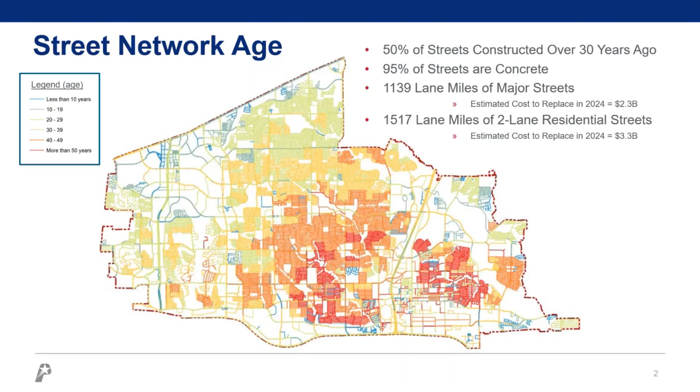We also highlight that if we were to replace all of our street infrastructure in the city, it would cost over $5.5 billion, not to mention the absolute headache it would be. Our pavement management plan's goal is to keep our streets in C or better condition. So we do minor repairs, which include joint sealing, but also more invasive work, from concrete panel rehabs all the way to major replacement. And then on our arterials we come back through and do the ultra thin overlay.

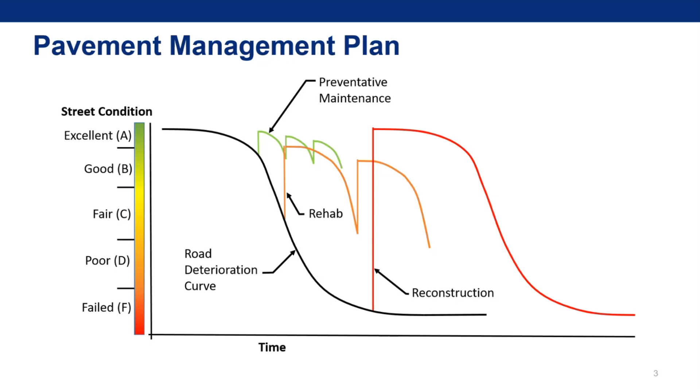Of the arterial lane miles, we have just over 1,100 of those. And this is kind of some photos. And I don't see Dan Prendergast here, but any of you that work in BGE, you've worked with Dan Prendergast. He is our director. About a year ago, he left. But I will say this was a lot of his effort and brain work that was put into putting a lot of these slides together.

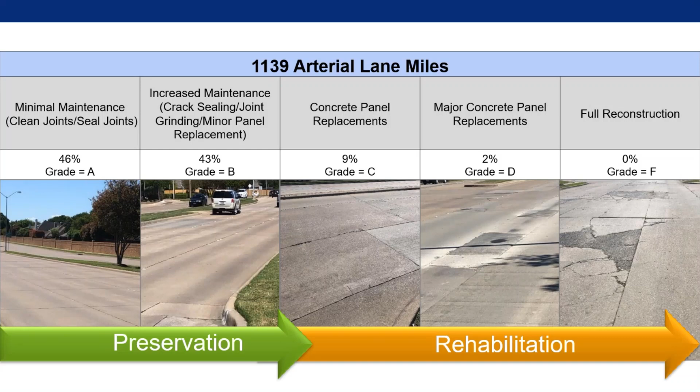So we went out, took pictures of all the different streets by grade, and this was used to help develop our pavement management plan and sell it to council for when we went out for our 2021 bond referendum. So everything that's kind of on that A through C section is really public works. When it's D and F, as long as that street needs less than 50% repaired, public works would do the work to it. If it's anything more than 50%, that's when we would push off to our engineering team. So as I mentioned, minimal maintenance stuff, but also the more invasive things like concrete panel replacement.

We use Cartograph / OpenGov asset management to do all of our streets scoring and tracking. We track not just our PCI scores, which we're getting ready to do another round of PCI scores this year, but we look and see where all the scores are at. But we also track all of our contractor repairs that we've done. So then, artificially, behind the scenes, the estimated PCI increases based upon those tasks being completed. And similarly, whenever we have a full reconstruction of a street, once engineering turns in those design drawings, the street age is then changed as an installation of a newer year, and that estimated PCI score goes up.

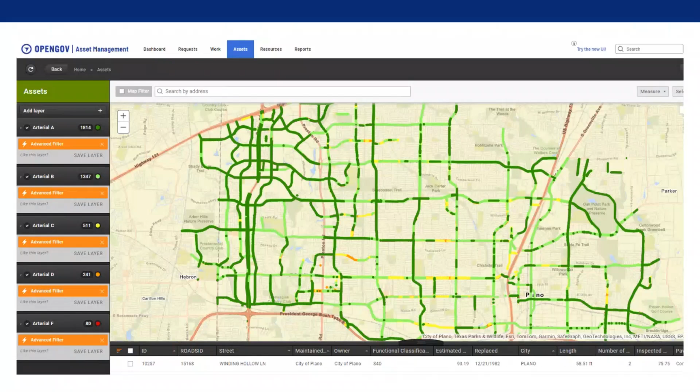We have two different curves built for deterioration in Cartograph. One is just a concrete deterioration. The other one is concrete with asphalt overlay. So that's how we kind of track each of ours. This is our residential lane miles. So we only do the overlays on arterials right now, but we have just over 1,500 lane miles of residential roads, and it's very similar treatment here as well.

We have two different approaches for residential. Beyond just our in-house crews that do smaller replacements that are more immediate, we have what we call requirements contracts, which is an alley or a street has deteriorated to a point where Public Works needs to send in a contractor. It's more than in-house can handle, but not part of our larger residential zones that we normally would plan. So we have those, and those are funded with our capital maintenance fund.

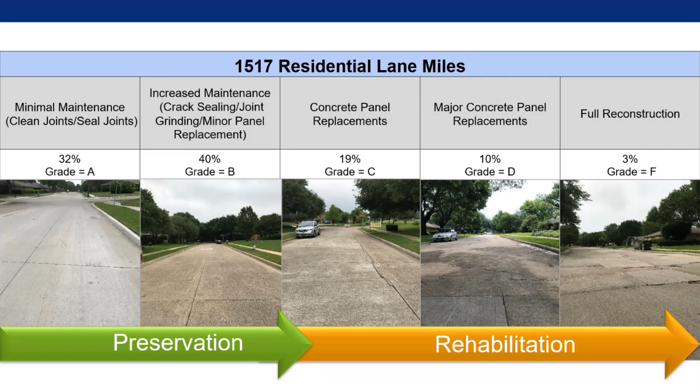The larger projects, which we call residential sweeps, those are going to be square blocked off areas that we have in the city. And we focus on going into those about once every 25 years and knocking out all of the streets, alleys, and sidewalk repairs that need to be done at that time. Typically takes us about 2.5-ish years to get through that neighborhood section, but our goal is to not come back for another 25 years. Again, kind of the overlay map showing what we estimate in Cartograph on what these PCI scores are, and our goal is to keep them in that yellow and green colors.

Pavement management plan, as I mentioned, although the residents think that it is best to go and do full concrete panel or full street replacement, we really try to focus on staying ahead and doing all the preventative maintenance that we can. We want to extend the life of all those concrete streets.

So as much as I've been talking about concrete streets, how many people in here are pavement engineers? Really? Nobody? Wow, this will be great.

Okay, so let me start off by saying, I just assumed everybody was, that for us, the concrete streets, I say water is the enemy for us. And so what that means is whenever water gets in between the joints of the concrete, it can expand when it freezes and cause cracking. It also can erode the subgrade. So our goal with any of our pavement strategies is to keep the water from getting underneath and in between those panels. So whenever we do a concrete panel replacement or we do joint sealing, our whole goal is to keep that water out. Then the ultra thin overlay will come behind that, and I'll kind of show you that.

So this is also a quick high-level overview of all the square footages of concrete Public Works has replaced. This includes sidewalks, and it includes streets, and it includes our alleys as well.

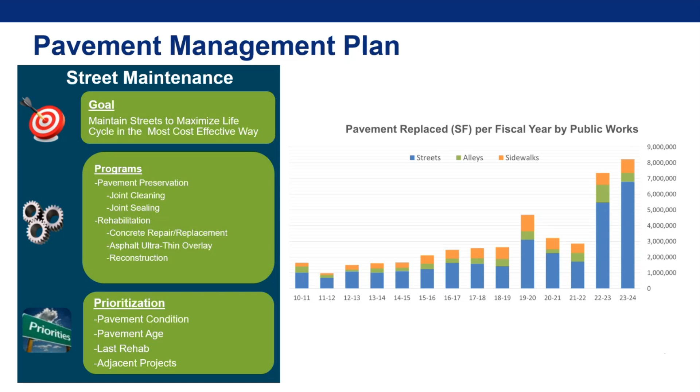So estimated costs is probably one of the things that we get a lot of questions on. And so regular concrete pavement replacement, both of these that are showing up here are showing estimated cost per lane mile. So for us, our arterials are usually about 6 lane miles. So you would take that number and you'd multiply it by 6 to get what that cost is of a full mile. And so what I really want to show you is the bottom red number is really expensive.

So when you take 2.4 times 6, you get almost $14.4 million to do 1 mile of replacement of an arterial roadway. That is really expensive, not to mention the amount of time and construction delays that occurs. But if you stay on the upper part, which is even with our concrete panel replacement, which can be, I tell residents, we don't intend for it to feel like a Mario Kart experience when you're driving down the roads, but we fix the panels in 1 lane and then we move to the next lane.

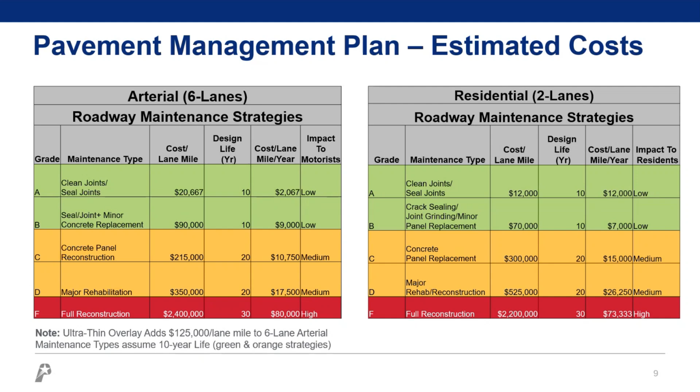And so with these, our major replacements, even we're doing those larger concrete replacements, it's about $350,000 per lane mile to do those replacements. And then it is an additional $125-ish thousand per lane mile to do the ultra thin overlay as well. Residentials are very similar. We try to stay ahead of them as much as we can. But what ultimately we try to explain is it is more cost effective to do the preventative maintenance and do small panel repairs and replacement than to do full roadway reconstruction.

So why did we choose to go with the overlay route? What we were finding, that Chris tells me, is that before we were going and doing arterial rehab panel replacements back probably 15, 20 years ago, we were noticing that we were having to come back to those arterial streets sooner than we really wanted to. So our goal was to try to figure out what technologies, what options are out there that we could utilize to extend those concrete repairs and ultimately provide that smoother ride.

Our concern was residents in Plano expect our streets to be concrete. That is what they think. If we put down asphalt, they're going to think that we're somehow cheaping out, which I get that question all the time. And so what we wanted to do was pilot it to see what happens if we do just concrete panel replacement in one section of a roadway. What happens if we do the concrete panel replacement and then put the ultra thin overlay on top of it?

And so I'm going to skip ahead since many of you said you're not pavement engineers, just real quick so I can show you some slides. So the asphalt overlay is, like I mentioned, we do the concrete panel replacement first, and then the spray paver comes behind that, and it puts down an emulsion. And that emulsion layer is actually what seals the concrete and keeps the water from getting into the joints and causing damage. Then behind that is when the ultra thin overlay goes on top. The overlay is about 3/4 of an inch thick, give or take, depending upon how the road undulates.

So with this approach, everyone thinks that the asphalt is the part that is actually waterproof. It's not. It's actually very porous. It does actually even reflect back heat, and it's a little bit of a cooling effect. And it does fade over time. And that's because we use a different aggregate spec, TxDOT 348, right, Simpson? Yeah, 348. If you want to look that up, I have a printed copy if you'd like to dig into those details.

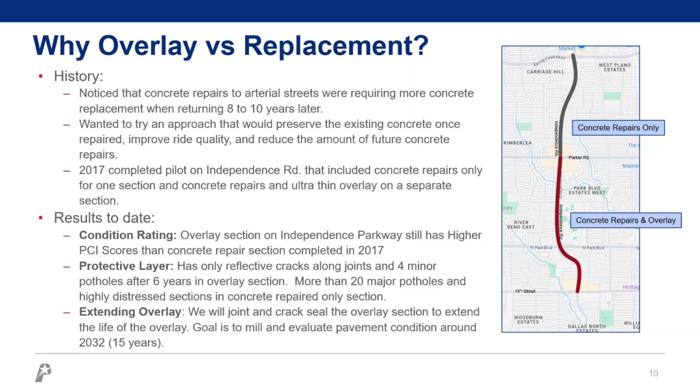So from a life cycle cost perspective, what we've looked at throughout this process is just traditional concrete replacement. If you assume the concrete street will last 40 years, your cost per mile is about $450,000. That's what our benchmarks have told us. But if you do concrete repair and the overlay, and you do joint sealing, and you plan a 15-year overlay process, it's closer to about $165,000 per mile to do that maintenance cost.

If we were to just do our original concrete repair and overlay with a 10-year plan, then that would be closer to $235,000. Still significantly less than a complete reconstruction of a concrete street. And that's pre-tariff estimates. So I'm not sure what those are going to look like soon.

For us also, because the overlay on Independence is doing really well, we've now shifted our pavement replacement plan for the arterials to be a 15-year plan. So our goal is to complete all 136 miles of overlays in a 15-year period that started in 2021. So if all goes well, we can get utilities in the right spots and everything. We hope to be done by 2036. And then we will restart milling off the overlay, doing concrete repair again, and then putting down a new overlay.

With the Independence Road section being about 5 years ahead of our first next overlay that was done, we feel like that 5-year window will give us, one, insights on when we do the next bond for that section, how much we'll need, but two, how well did the concrete do underneath that overlay? In the process, by the end of this year, we'll have just under 50 miles done of overlay, and we've learned some things through the process.

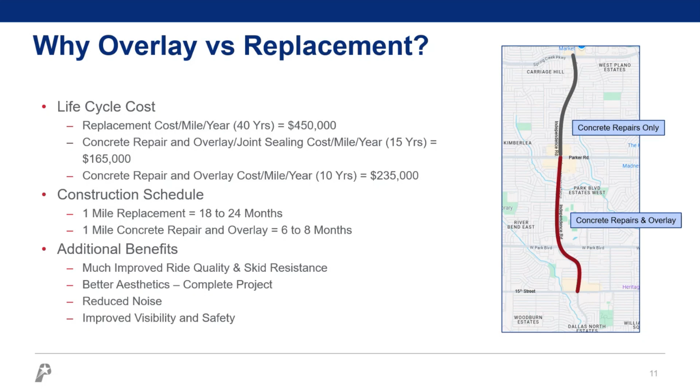So this is our progress to date. I always like to put up there, our first big investment in this was our 2021 bond, where we had asked for $100 million. The plan was to do 50 miles with that $100 million. And by the end of this summer, which will be the full spend of that $100 million for us, we'll have completed almost that number, which is 45.6 miles, I think is what it is. But we'll be just under that.

And then the other part is our current bond referendum that our residents are evaluating to vote on, which is in May, we've asked for $130 million. We're actually going to be able to do less roads with that $130 million. And that's for 2 reasons. One, our goal is to not have multiple parallel arterials under construction at the same time. And so we only have so many roadways that we can do concrete on and then follow up with an overlay. Also, some of our roadways need to have the water or sewer infrastructure improved underneath them first. And so we want to make sure we give our engineering department time to do that.

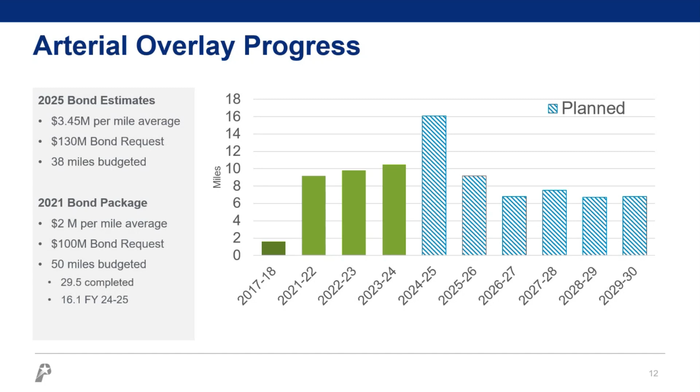And then as we've shifted into this 15-year plan instead of a 10-year plan, the pressure to get 50 miles done up front has eased, we can stretch it out a little bit further now. So we did build into the bond a 10% increase in overlay construction costs and an 8% increase for concrete, based upon our best guess with all of our information at the time. But this is kind of our plan overall. This is one of the slides I developed for sharing about the bond referendum. So residents can see sometimes it's higher, sometimes it's lower, but we plan to average about 8 to 10 per year to hit that 2036 number for all the arterials.

This is our overlay map. If you haven't driven on one of our overlays, you can go tour around the city on all these different spots. The green ones are the locations we've completed. The yellow are spots that are currently going to be overlaid. This year, we've got 2 contractors that will be doing our overlays. Last year, we had 1. And because the overlay time period is so short, you can only put down the overlay when the temperatures are above 55 degrees. That cycle got shorter, and our contractor ran out of time. So we have a second contractor that bid this year. So we'll have 2 contractors working on overlays to do about 16 miles this year is what's planned.

Anything that's in blue is a location where we are currently doing concrete panel replacement and rehabilitation. And then we will go back through with an overlay next summer or the summer after, just depending upon where that location is.

You'll see the blue section that's highlighted on Parker Road. I know our Plano residents in here had mentioned. So Parker Road was actually a water line replacement project first. We needed to make sure that the old cast iron line underneath was replaced before we did brand new concrete and then an overlay on top of it. So that process went through first. And then we are now doing the last part of the concrete panel replacements, and then an overlay will be planned for next summer for that one.

Same thing is happening on Park Blvd as well. We've got the connections that are cast iron that go underneath the roadway. Our engineering team is working on updating those. Then we'll do concrete panel replacement, and then Park should be in 2027-ish. But this is kind of our plan.

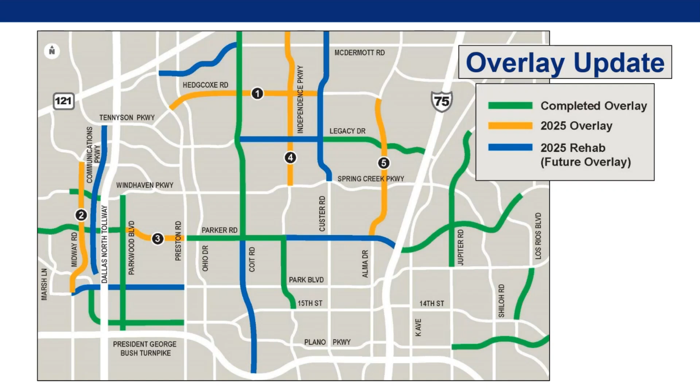We don't usually put a map out much further than about an 18-month to 2-year part. And that's partly because of council approval to make sure that the funding is actually allocated. But two, it could change depending upon what goes on with engineering. For instance, the bottom section of Plano Parkway, even though that is an older roadway, our engineering group is about to start a major sewer line capacity project down there. So we just continue to patch the potholes until they start moving on that project. Nothing makes a resident madder than putting down brand new concrete and taking it right back out.

We did learn in that process that any of the edge milling does need to be done during the daytime, but then we could do the night work behind it. It actually went so well that we now build that into each of our contracts to have the night work piece whenever the temperatures shift. And on top of that, we're actually evaluating and discussing internally, should we even allow concrete type night work and prep in order to alleviate some of those congestion concerns? Because closing 2 lanes at night is much better than closing 2 lanes from 9 a.m. to 4 p.m. It definitely causes a little bit more of a headache.

Timing is everything. So for us, originally when we were doing this, we would put out our contracts with the intent of the notice to proceed being very shortly after, and then the contractors would mobilize. What we noticed is that sometimes that can reduce the number of contractors available. They have much bigger jobs going on. 8 to 9 miles might sound like a lot, but TxDOT and other places, not just here in the DFW area, are going to be putting down many, many more miles in that time period. So we're kind of like a small fish in that pond. So we wanted to try something different.

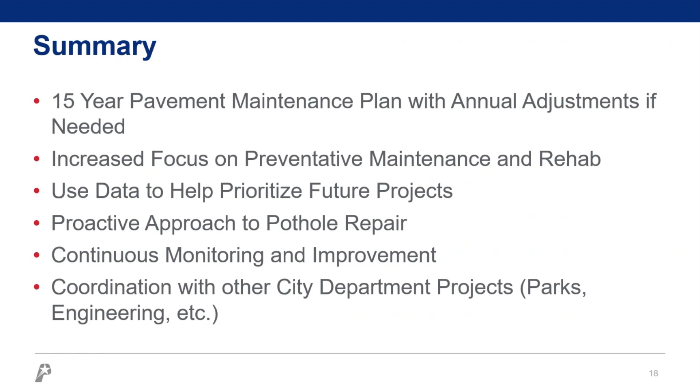So, all right, did it in 30 minutes. So Plano residents, you can take these numbers down. They are faster than I am probably in responding to your questions. But overall, you're welcome to email us anything. What questions do you all have?

Since now I know most of you aren't pavement engineers, I have like a huge sigh of relief. Yes. Samson.

Yeah. But type B, I know that one at least. There we go. So for surface aggregate classification, we use class. And like I said, it's Tex-348 if you'd like to see this back. Yeah. Yes.

I don't know on a full road replacement, because those go into our engineering department when they do the full design and reconstruction. I can get it for you. If you send me an email, I'll work with them to get it. Overall, like I said, we've calculated it's about $2.4 million in order to do one lane of arterial. And so if you were to do the math out from that one.

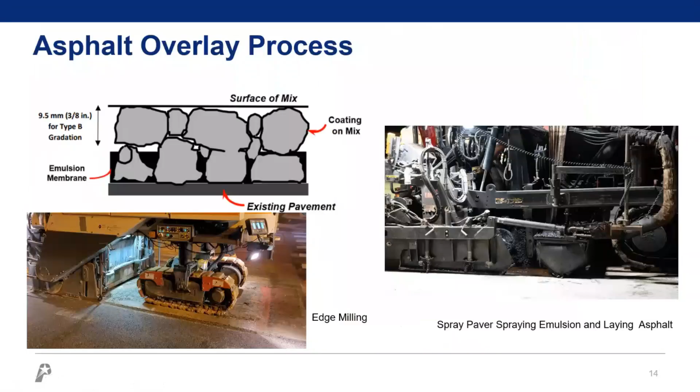Oh, like a finished product of it? The process? I thought, well, it's kind of zoomed in too much probably. Yeah. I don't really have, because this is it. This one right here is with the fresh asphalt that's gone down. That's a spray paver, yeah. So it's spraying the emulsion at the same time it's putting the ultra thin overlay on it.

And it has, leveling is not the right word, but the leveling device behind it that our inspectors are constantly watching, because we pay per square yard. And so we want to make sure we're getting it at 3/8 of an inch. That's why we do it per square yard instead of however much they put down, we're just going to pay for that.

The emulsion, the spray mix, yeah. It's a liquid. It's hot. It's very hot. Yeah, so that goes down first and it's spraying out of it. There's like little nozzles throughout that are spraying the emulsion down. And then right behind that is where the asphalt is coming in through the overlay, the leveling machine. What is it called? It is a leveler, right? Yeah, it's a roller thing.

We actually have a video. I'll try to send it out so you guys can have it. There's a video on the Plano website that shows the overlay process and what it looks like too.

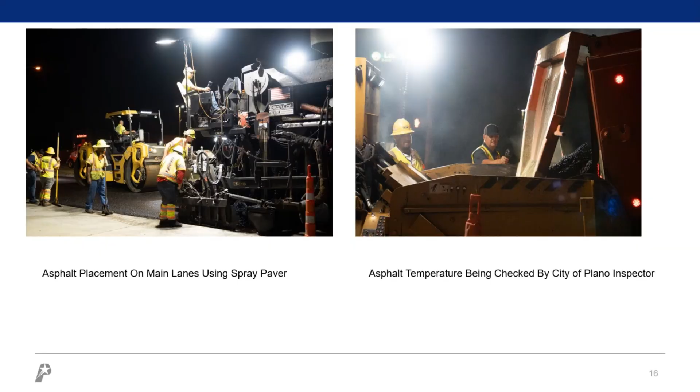Additional spray, we have to do it separately and come back later on top of the paver. We found out what happens if you try to apply that and bring up that emulsion, especially in the turn lanes and the crossovers. They try to turn that paver over, it brings up the emulsion, and then you don't have anything to make the ultra thin layer stick.

So that's why we went to the conventional method, because the big machine can't turn so well in those small areas, on the turn lanes and crossovers. The product is really designed to go straight. Yeah. Now, turn lanes and cross sections, those are still ordered. Yes.

Okay, so we're gonna do a little rapid fire, since we have a few minutes before we go into the main presentation. I'll do a couple of rapid fire questions. Plano residents, hands up. How many of you have called into the city and said, I'm a Plano resident and an engineer? Just me? Okay, just me.

Not true, but how many of you have that Fix It Plano app on your phone? Yes, if you don't have it on your phone, get it on your phone. It's there to help replace not just your asphalt. You can get your trash bins replaced. You can report downed illumination poles. I've done that. You can get your signals returned. Chad right here.